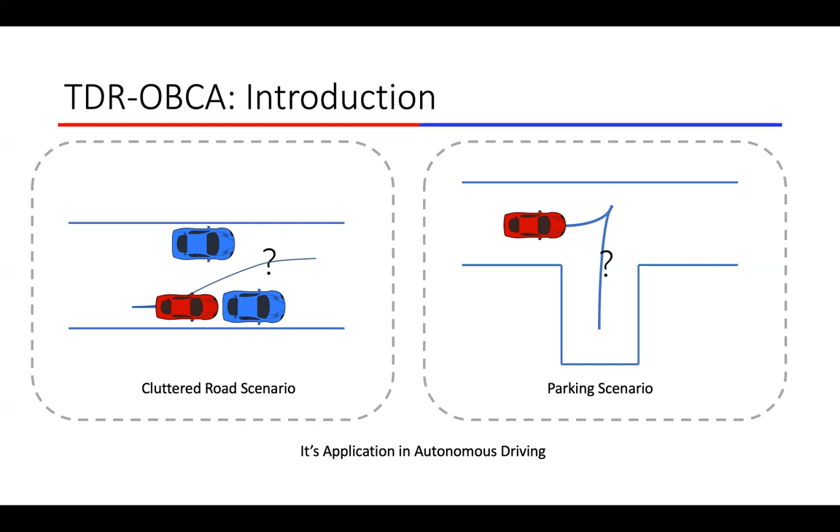Collision avoidance is a critical factor to consider in today's autonomous driving applications. There are lots of scenarios which can be seen as unstructured free space, where the vehicle has to do some complex maneuvers going forward or backward to reach the destination without collision. It could involve cluttered road scenarios, parking, and many others.

For polygon-like ego vehicle and obstacles, the tricky part of collision avoidance in optimization-based motion planning is how to balance between accuracy and computation complexity. There are different ways to do it. One is by mixed integer programming, solving which side of the obstacle polygon the vehicle has to avoid. It oftentimes involves solving with the branch and bound technique, which is complex in real-time computation.

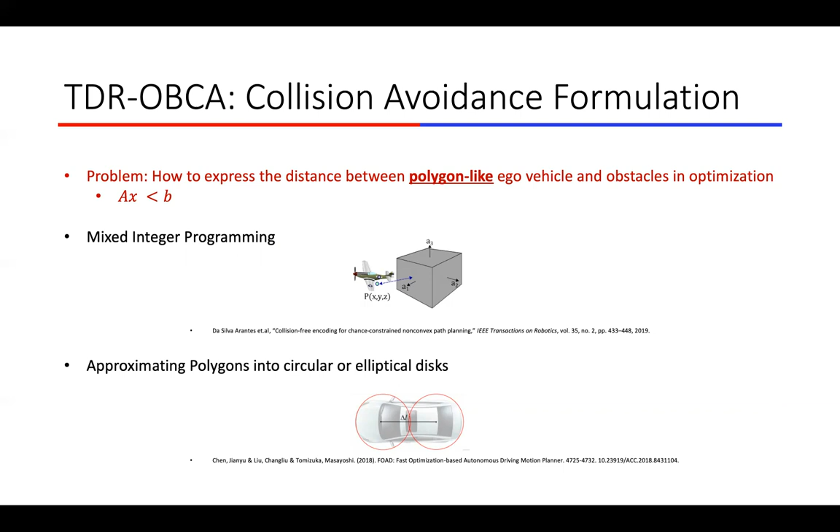Some others use circular or elliptical disks to approximate the shape of obstacles. It would not be accurate enough to cover the polygon with it, and sometimes the over-approximation would waste some feasible region for the vehicle to drive into.

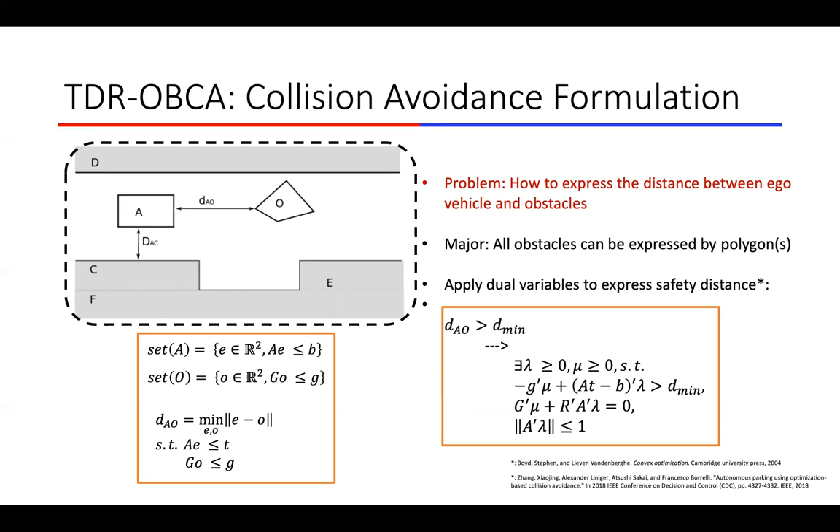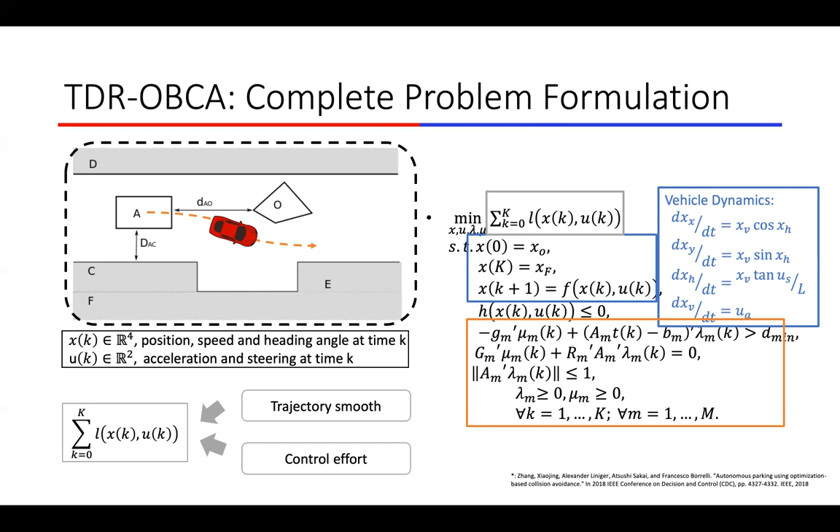With the collision avoidance constraint introduced, let's dive into the complete problem formulation. The vehicle states include Cartesian coordinates x, y, vehicle speed, and heading. The vehicle dynamics is approximated with the kinematic bicycle model. The collision avoidance constraint is incorporated with extra dual variables, lambda and mu. The optimization objective contains mainly two parts: trajectory smoothness and control efforts.

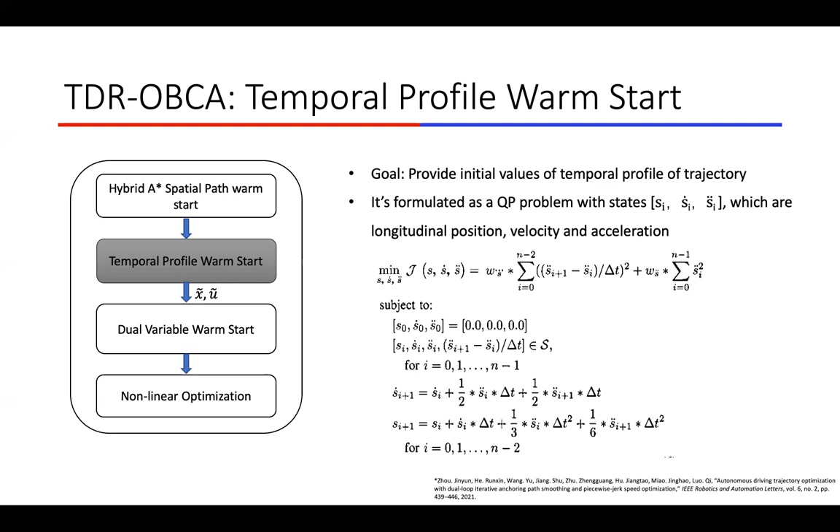Like in H-OBCA, we also apply hybrid A star to get an initial path profile warm start. To further warm start the trajectory, we formulate a longitudinal speed optimization for the temporal profile. The optimization is formulated as a quadratic programming problem with states of longitudinal position, velocity, and acceleration. The state dynamics is formulated as the third-order Taylor expansion of the temporal states. The objective includes minimization of acceleration and acceleration change rate.

The dual variables used in obstacle collision avoidance constraints can also be warm started with quadratically constrained quadratic programming with the distance term minimized in the objective. In our work, we propose to move the quadratic constraint term into the objective function to form a relaxed version of the original problem as a simple quadratic program. It would lead to a suboptimal point, but it is much more efficient to solve.

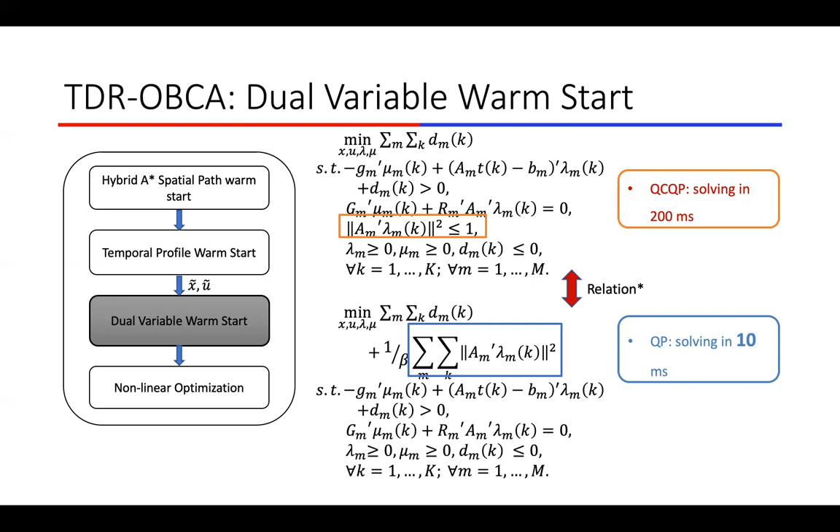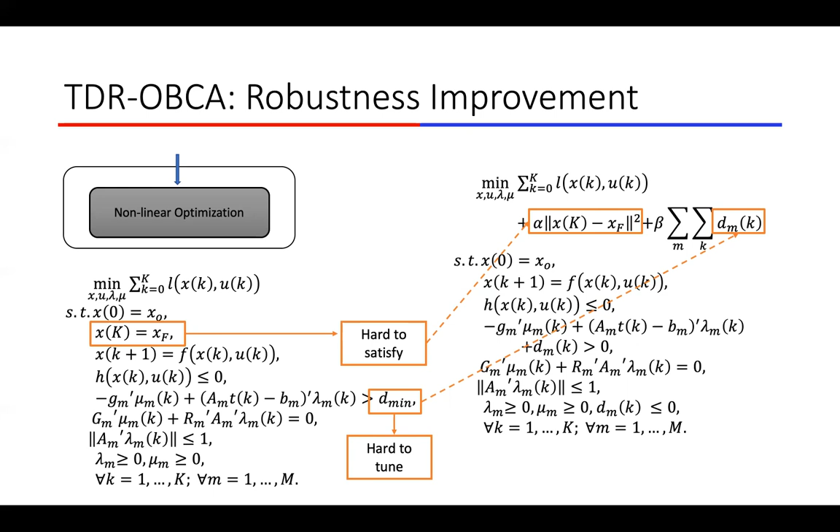In the final nonlinear optimization, minimal distance d_min in the equation is a hyperparameter for minimum safety distance, but it is hard to tune for general scenarios. Besides that, both initial and end state constraints make the nonlinear optimization solver slow and, in extreme cases, hard to find a feasible solution. So to address the issues, the end states are relaxed to a soft constraint in the objective, and we add a collection of slack variables d into the objective to relax the minimum distance keeping.

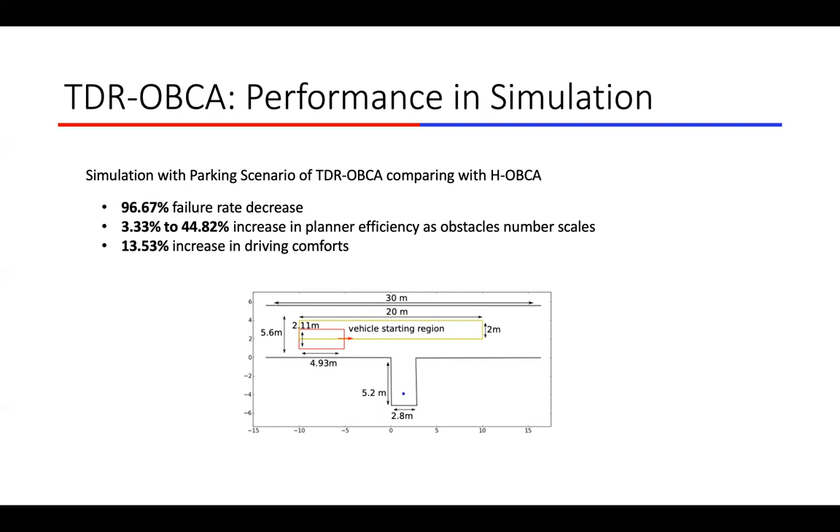We did simulations on parking scenarios to test our warm start and reformulation techniques compared with H-OBCA. The results show about 96% failure rate decrease, 3% to 44% increase in planner efficiency as the number of obstacles scales up, and 13% increase in driving comfort.

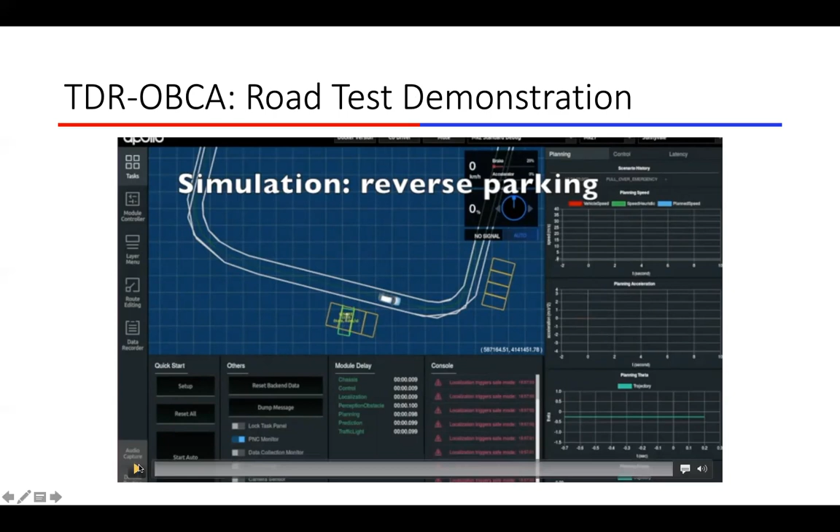Let's show a video including simulation and road test. First is a clip of reverse parking in simulation. The vehicle parks into the spot after it is clear. Then it is a road test. You can see the vehicle control tracks the trajectory closely.

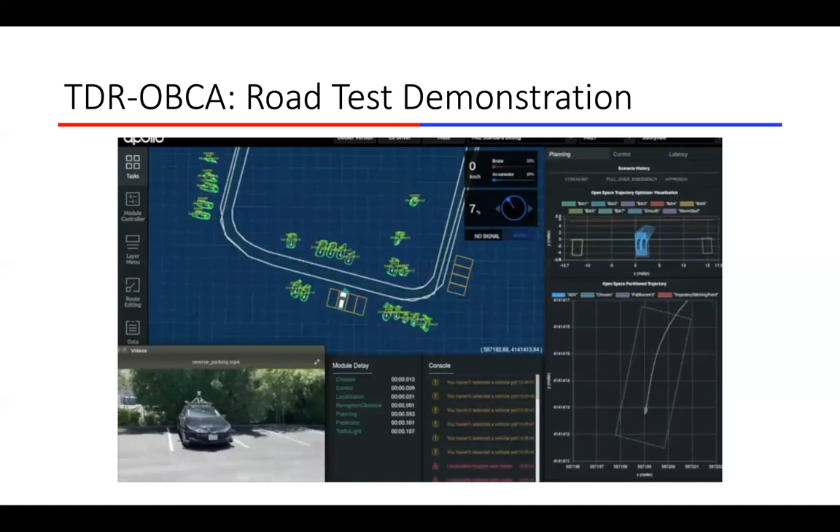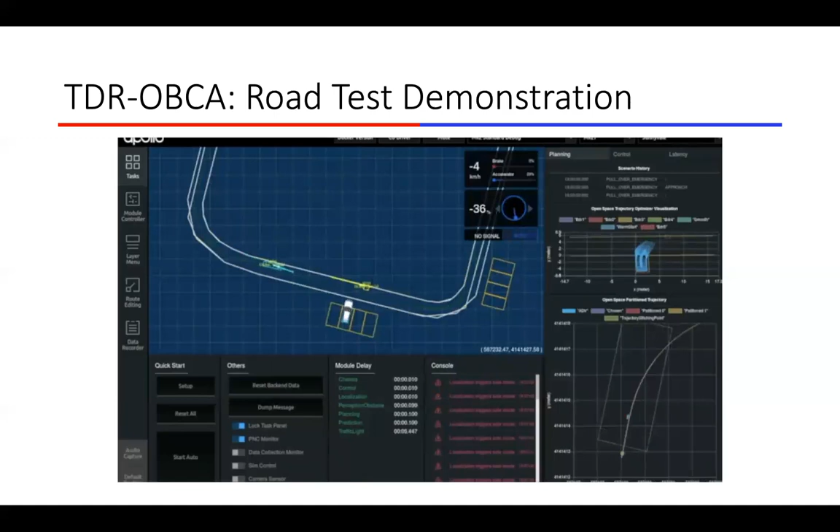Then it's a zigzag parking, which means the vehicle has to use reverse gear in the process. Then it is a real-world test for the zigzag parking. You could also see the control module performs pretty well on tracking the vehicle heading, as well as the position.